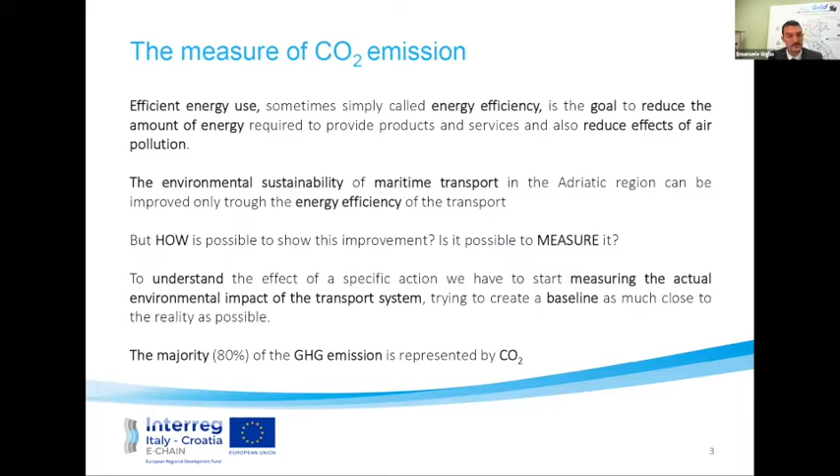If we were in an ideal world, to understand how much CO2 transport is emitting now, we would have to put instruments in every vehicle that we have in the world. Ideally, of course, this is not possible. It's far from being realized. So we have to find a way to estimate this emission, as accurately as we can.

But simplify it. Of course, we have to remove some factors in this calculation. Several ways exist that are really different, and I will show you two of these calculators.

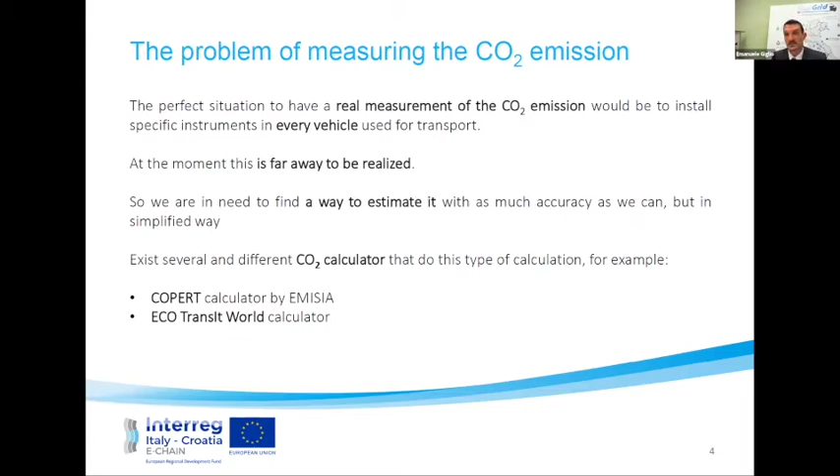That is the Copert calculator made by EMISIA, and Ecotransit World, which is a calculator, a website. We start with the Copert calculator.

Why did we choose this? We chose this calculator because it's the EU standard vehicle emission calculator. It's developed by EMISIA, a spin-off company of the Aristotle University of Thessaloniki. And it uses vehicle population.

So we are talking about terrestrial vehicles, to calculate the emission and energy consumption of this type of transport. Copert's development is coordinated by the European Environment Agency, in the framework of the activities of the European Topic Center for Air Pollution and Climate Change Mitigation. The European Commission Joint Research Center also manages the scientific development of the model.

So Copert is something really official, and the characteristic of Copert is that it's internationally recognized. It is used by many European countries for reporting official emission data. It's an incredible research tool, used by a lot of universities to calculate emissions nationally, regionally, and also on a local scale.

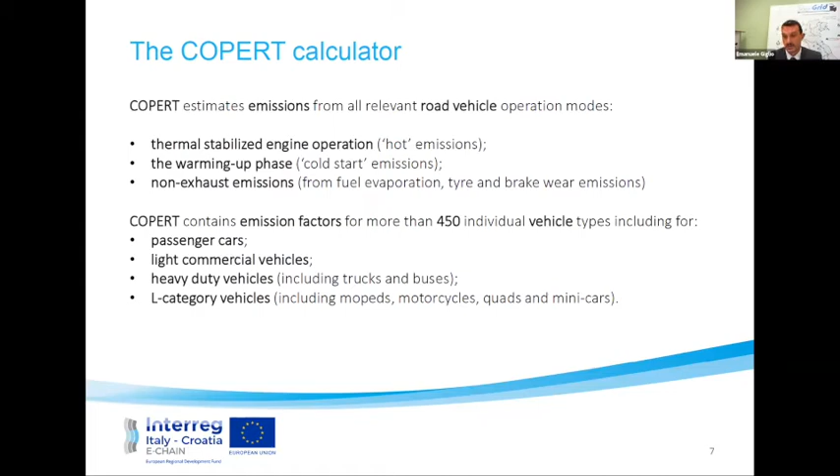So we, as Echain, decided - because of our project, and I will show you something about Echain afterward - to use Copert to calculate the CO2 emission of transport. Then we will see a bit further, a bit better, how.

The other calculator I want to show is Ecotransit World, and I decided to show it to you because it's one of the most widely used software for automatic calculation of energy consumption, carbon emission, air pollutants, and external costs about different types of transport, not just terrestrial vehicles.

It's compliant with different standards. That's really important because it gives scientific approval to this method, such as the GLEC framework, DIN EN 16258, and the GHG protocol.

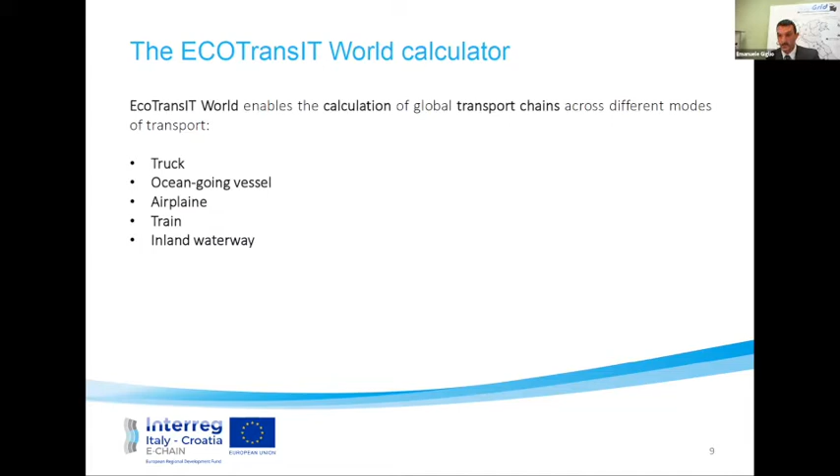The characteristic that's really important about this freight transport calculator is that it includes truck, ocean-going vessel, airplane, train, and inland waterway. So it can give you a real complete analysis about the CO2 emission of a particular path.

Ecotransit World calculates energy consumption, greenhouse gases, air pollutants, and external costs based on an energy-based bottom-up approach, including internal routing. As we said, the methodology is provided by independent scientific institutes, such as the Fraunhofer Institute of Material and Logistics, Ifeu, and Infras. The emissions are determined on the basis of energy requirement, using the associated fuel and other parameters, and carrier-specific internal routing is the base for identifying the route characteristics.

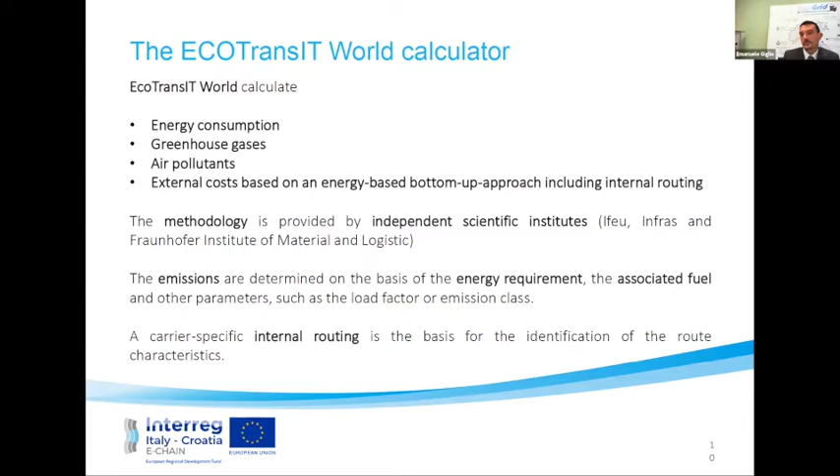So these are two of the most widely used calculators, but they are always an estimation of CO2 consumption and CO2 emission about different types of transport.

Differently is this regulation that I will show you now, because in 2015, the European Parliament and the Council of the European Union adopted this regulation, 2015-757, when in this regulation, the European Parliament decided that they have to research something, to check how much CO2 the big vessels are emitting from the sea boat, from the ship.

The regulation was about the introduction of a union MRV system, so monitoring, reporting, and verification, for monitoring CO2 emission for every ship in all intra-union voyages, all incoming voyages from the last non-union port to the first union port of call, and all outgoing voyages from a union port to the next non-union port of call.

They were thinking, the idea when they decided to adopt this regulation, is that every time you measure something, every time you have data about something, there is a natural improving of efficiency, that can lead to emission reduction of up to 2% compared to business as usual. So they were thinking about that in this way. They would have a baseline about the CO2 emission of the maritime transport, and also an improvement of the reduction of the emission.

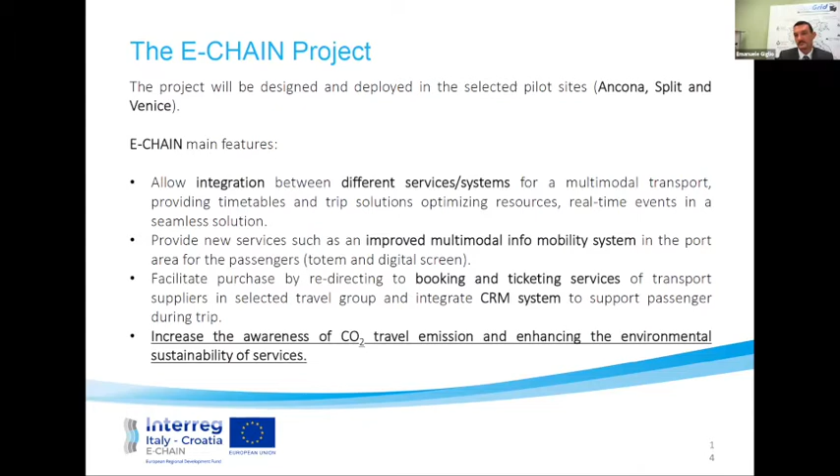Using all this data, we can help reduce the impact on environmental transport. I know I was really fast, but I think the other colleague will be much more specific about how to do this in their project. This is the way that Echain decided to pursue reducing the environmental impact of transport, just to give more awareness to the passenger so they can choose the best option. Thank you for your attention.

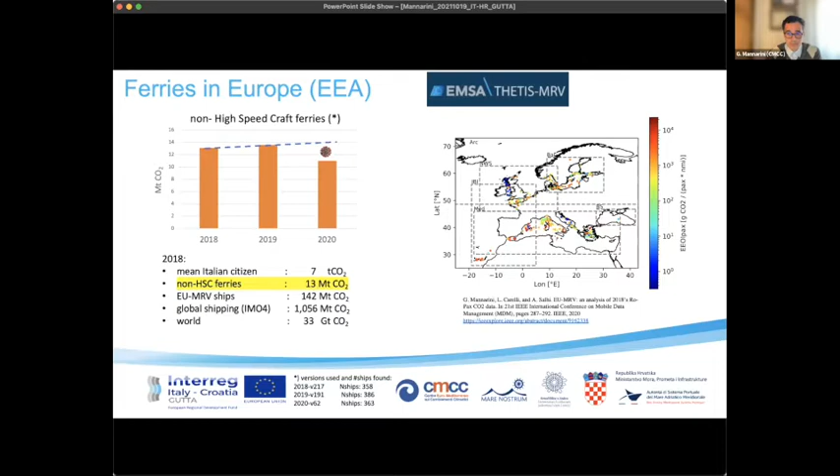This point about efficiency is quite relevant, as it is the subject of a quite recent regulation by the International Maritime Organization, which last summer, in June exactly, approved a plan to reduce the carbon intensity of all ships globally, not just ferries in Europe, according to a specific trajectory.

So there is initially a very mild, low, close to business as usual reduction, and then starting from 2023, there is an increase in the reduction speed for this carbon intensity figure. However, there are indications that this measure will not be sufficient for achieving IMO's goal of decarbonization, not even to halve emissions by mid of this century. So it is likely that this regulation will be soon reviewed for increasing the rate at which ships and ferries should increase their energy efficiency.

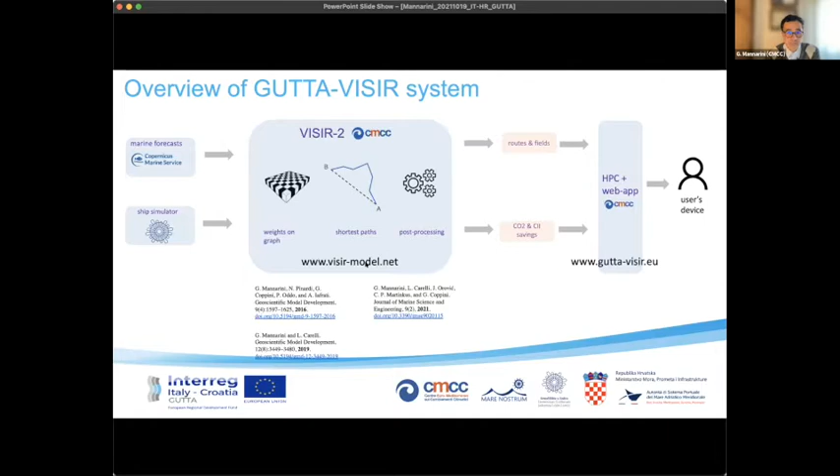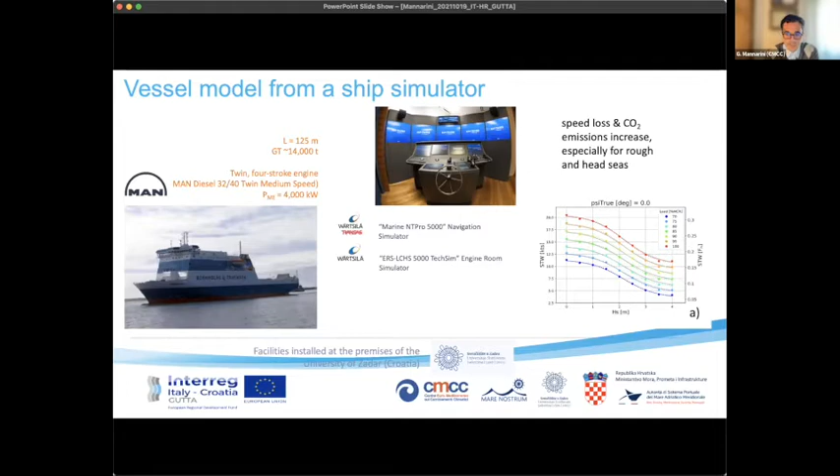But I have just 5 minutes to go to some of the results. For achieving these results, we used also data from a ship simulator installed at the University of Zadar, which is one of the partners within the GUTTA project. Basically, we have the capacity to compute how the ship behaves in both wind and waves. Specifically, as you would expect, the ship will decrease its speed. There is involuntary speed loss in waves, especially for head seas, and corresponding CO2 emission increase.

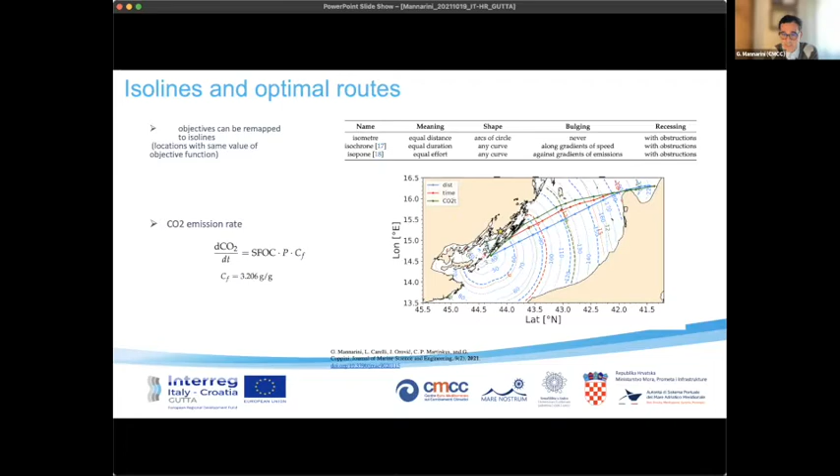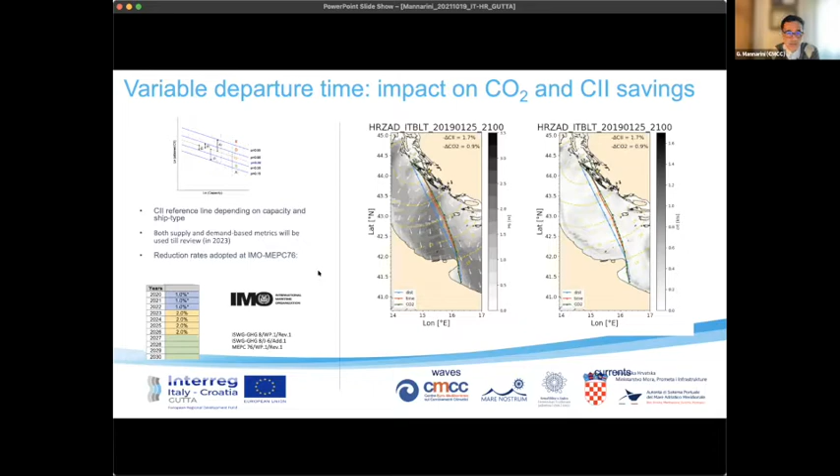And then we embed these into VISIR for the computation of optimal routes from Croatia to Italy and vice versa. We are able to compute least distance, least time, and least CO2 routes, which can be different depending on the meteo-marine conditions. For instance, in this animation, you would see that for various departure dates and times, the optimal route changes, and correspondingly, the CO2 and carbon intensity saving. So this is the link to the IMO regulation I mentioned at the beginning of my talk. Basically, we are able, through this system, to compute what would be the carbon intensity savings for a ferry sailing, making expert use of the meteo-oceanographic information.

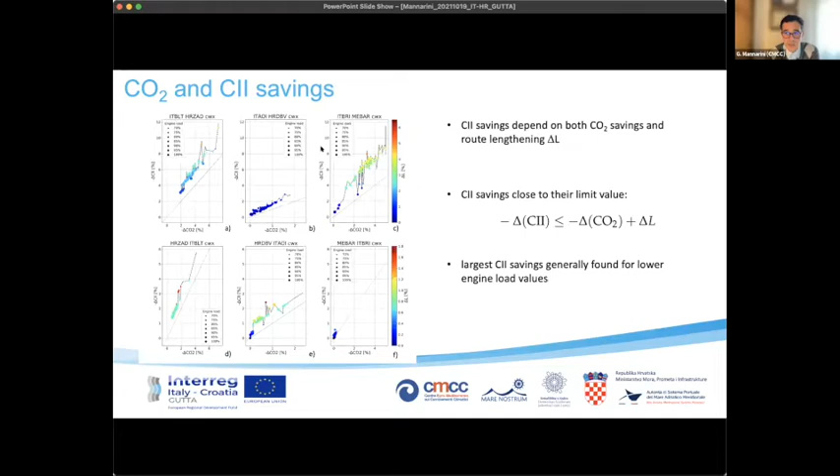In a publication we made last year, we started with a case study for assessing how large these savings can be, and they can indeed be quite large. But the definitive answer about this cannot come but from an operational system, which you access every day, starting from the freshest forecast data.

And this is what we realized at gutta-visir.eu, which I invite you to visit after this seminar, maybe. I would really appreciate if you could provide your feedback as a user, since we are in a kind of beta version, so it's in an experimental phase. We still have some time before project end to improve the portal and the system to come closer to the needs of the users, both the professionals and generalistic users.

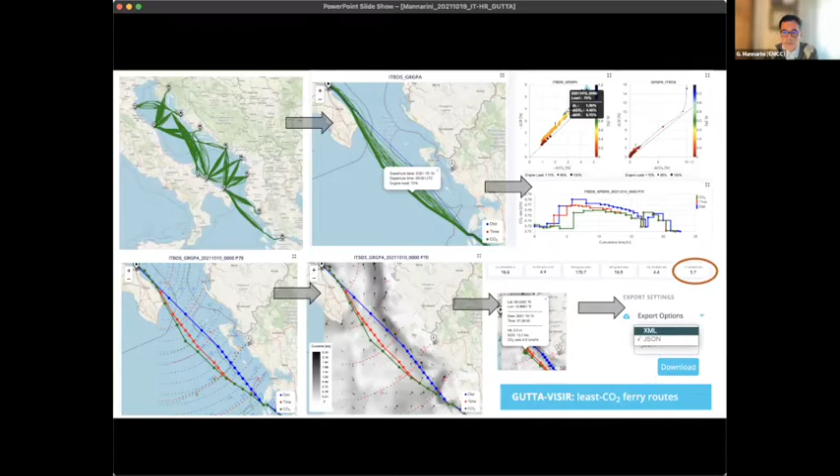Finally, 30 seconds to conclude. Ferries are the focus of GUTTA, for improving the connectivity between Italy and Croatia, and because their emissions are over-proportional with respect to other ship types. The operational voyage planning is a solution for contributing to decarbonization for both old, existing and new ships, even for those fueled by low carbon fuels.

We have realized this GUTTA-VISIR service, which is based on a scientifically sound and open access model for ship routing. The service is freely accessible through an open web app. We have evidence of significant CO2 and carbon intensity reductions, of course, when there is some significant weather condition to be avoided. If the weather is calm, it's much more limited.

And we are really looking forward to entering this phase where we validate this system together with the stakeholders, the ship masters, the vessel traffic systems, the ports, the harbors, and so on. So thank you very much for your attention, and see you later on during the panel.

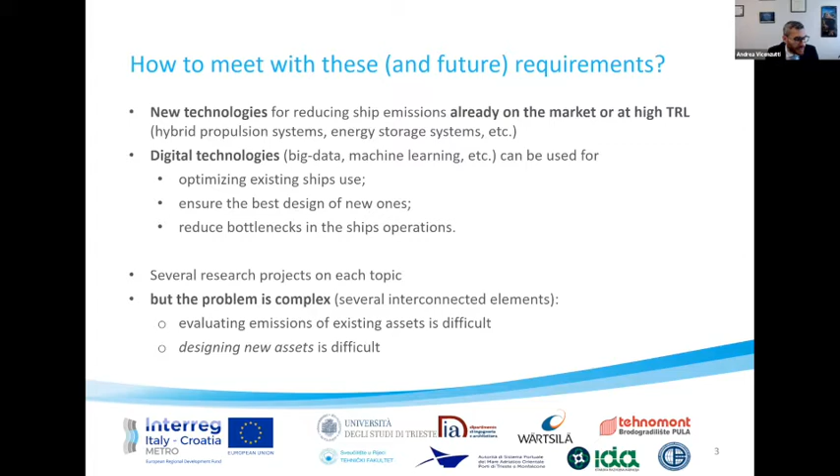This is difficult in the maritime sector because it is peculiar in respect to other industrial sectors. One thing we need to do is provide a proof of concept of how new technologies can be integrated into ships. We have a lot of pieces, like a Lego, hybrid propulsion, energy storage system, and so on, and we need to put them together into a ship.

We need to demonstrate to the future ship owner that the integration of these components ensures the expected advantages. We need lower pollution, but also need to demonstrate that the integration of these new pieces does not make the ship worse in other key performance indicators, like reducing too much the payload.

Moreover, we need to do that for each specific ship type, because a dry bulk carrier is different from a tanker, which is different from a passenger ship. We need to do that for each different route, daily operative routine, specific work for ships that can do different works, and so on.

Last but not least, we need to ensure the existence of the proper support land infrastructure. For example, if we want to use ships with LNG, we need the LNG bunkering facility, and then we need someone who produces and transports the LNG to that facility. So we need to shift toward a design approach which is more integrated.

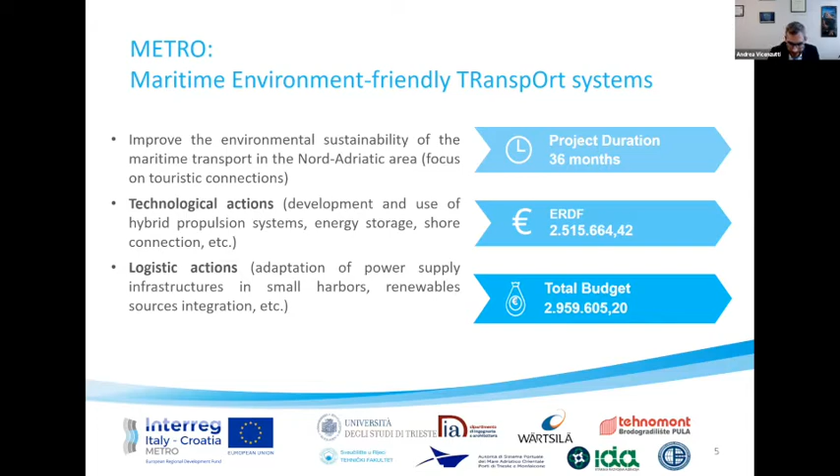Being the maritime sector huge, we cannot do the project considering all possible ships and all possible routes. So we decided to focus on 2 routes and 2 ships.

We selected a short route but with heavy traffic, the Brestova-Porozina route, which is actually served by a double-ended ferry. And then the Ancona-Split route, a medium-length line, served by a roll-on, roll-off passenger ship.

In this regard, we made the preliminary design of 2 new green ships using commercial off-the-shelf technologies, so nothing from research, only pieces that can actually be bought from the stores. And then we evaluated the port and land infrastructure that needs to be used for supporting these ships, proposing upgrades when needed.

There is also a point on analysis and promotion of multimodal transport, which is more related to the Brestova-Porozina route because its ports are very small and they need more integration with the transport systems and so on.

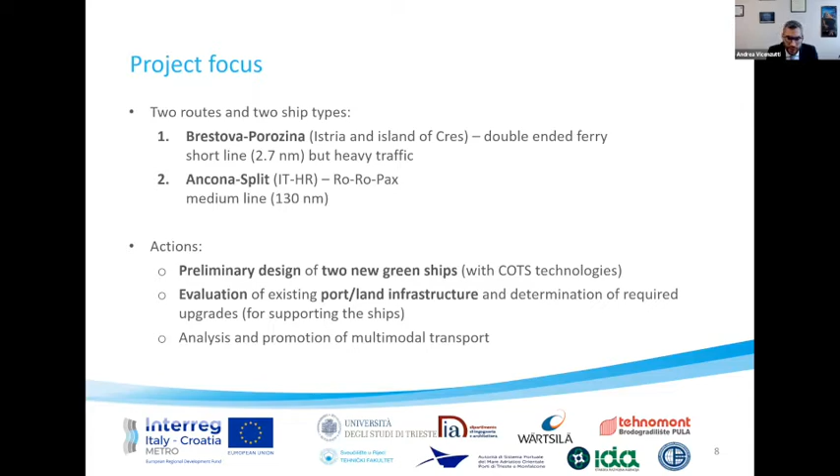So this is an example of what we have done. This is the design of the bidirectional ferry for the short route, Brestova-Porozina, which we have done applying a data-driven design process.

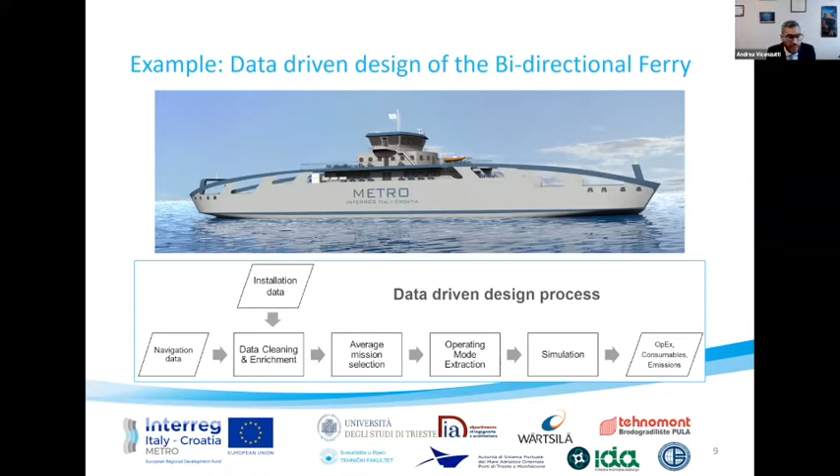We started from data of the existing route and used that to extract all the possible information for designing the best ship for that route. We selected the best ship for that route, considering things like operational expenditure, consumables, and obviously pollutant emissions.

This is on the left. You can see the location of the route, which connects the Istrian Peninsula with the Cres Island. And on the right, you can see an example of the data we used.

Here we have a set of sampling of speed and position taken from January 2016 to June 2019. There are like 125,000 samples, and we use data like this for extracting the speed and position samples, estimating the ship operation, and so on.

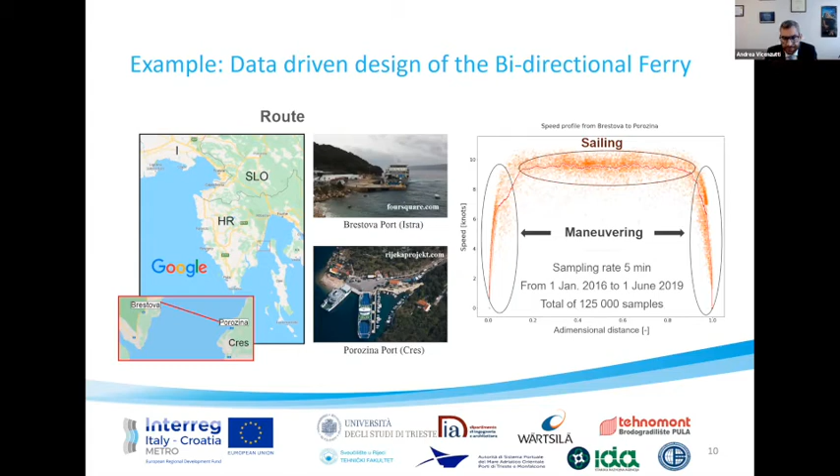Using the data, we evaluated different configurations for the propulsion system of the ferry, more than 4. I show you 4 only as an example here, which start from the conventional diesel mechanical propulsion system, the one actually used on that route, and then go toward more hybrid solutions with electrification and so on.

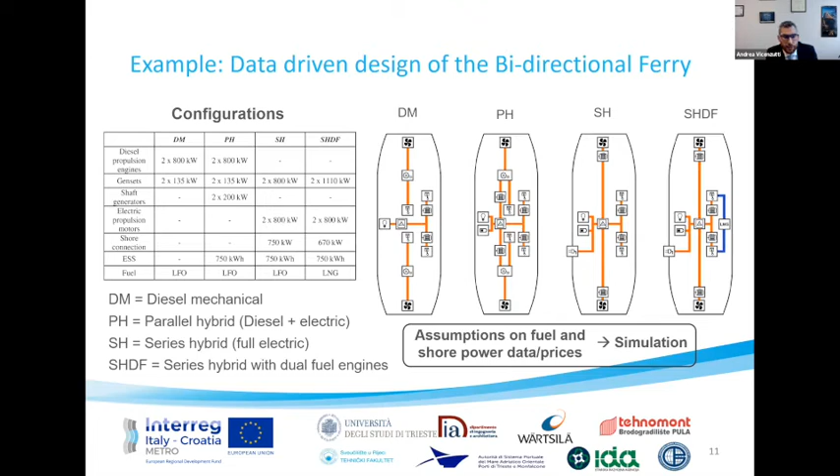We put some assumptions on fuel and shore power data and prices for doing the simulations, and we evaluated the impact of each possible configuration on the outputs. These are, as an example, the annual carbon dioxide emissions for the 4 configurations.

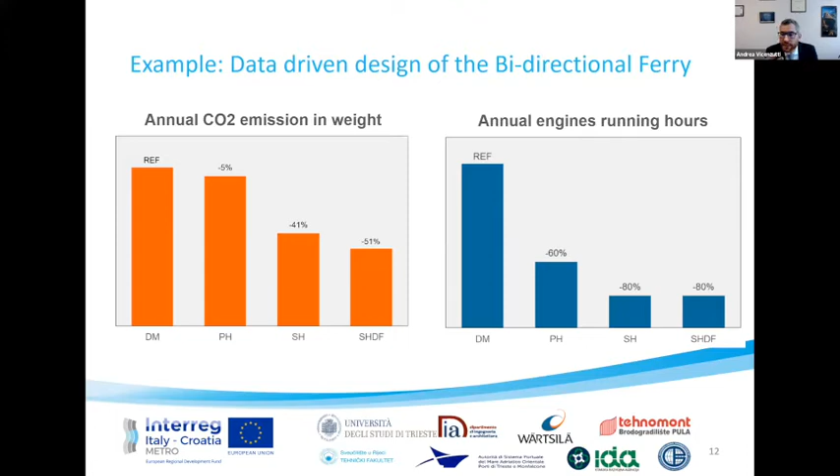We have taken the existing ship as a reference, and then we compared it with other solutions. You can see that the 3 shown solutions allow us to reduce carbon dioxide emissions. They also allow us to reduce the annual engine running hours, so less.

And we also evaluated the operating expenditure for the owner. As you can see, for the series hybrid, which is the 3rd one, and the series hybrid with dual fuel, so with LNG, there is a high percentage of the operative expenditure that depends on the price of the shore power, so the cost of the electricity given by the shore, because they have an onboard battery system which is charged by the shore.

All the solutions that have some electrification allow us to reduce carbon dioxide emissions, engine running hours, and also allow us to reduce the operative expenditure for the owner. This is significant because it means the owner is not only pushed towards buying a new ship because otherwise the policies make him pay more, or he cannot use the ship anymore, but it's also giving him a motivation regarding costs. We can both do something good for the environment and reduce costs. So it's good for the owner. This promotes the change of ships, the move toward a more sustainable transportation system.

So we selected the series hybrid, the 3rd column in the picture, as the best compromise, because the 4th one, the best one, uses LNG, and none of the ports had nearby LNG bunkering facilities. So we selected that for designing our ferry, for doing our preliminary design.

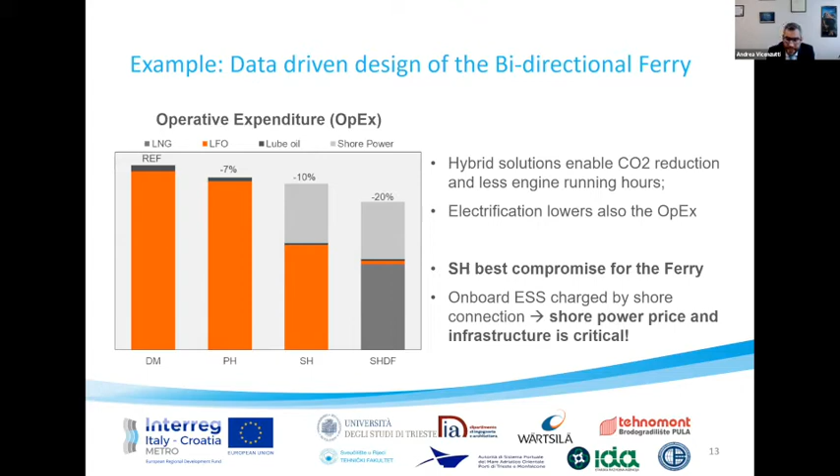So we also, as I said before, analyzed the land side of the problem. This is a very short and easy example for demonstrating what we are doing in this regard. We have seen that there are some parameters that affect how the same ship behaves depending on the port side. The first thing is the presence or not of the recharge infrastructure in the ports on the route - whether it's only in one port, in 2 ports, and so on.

Also, the shore connection power has a significant impact. Also, the time at berth, because the onboard batteries can be recharged only when the ship is berthed. So if the ship is berthed for a very short period of time, we have no time to recharge the battery. All these parameters can have a really big effect on the results given by the same ship, which was the best one we conceived for that route.

So I'll show you just a short example based on the same ferry on the same route, a short route. In this case, we changed only the power of the shore connection for recharging the ship. We used a low power shore connection, which is the 160 kW one, which is sufficient for achieving the recharge during the night of the entire battery of the ship, but then cannot be used during the day.

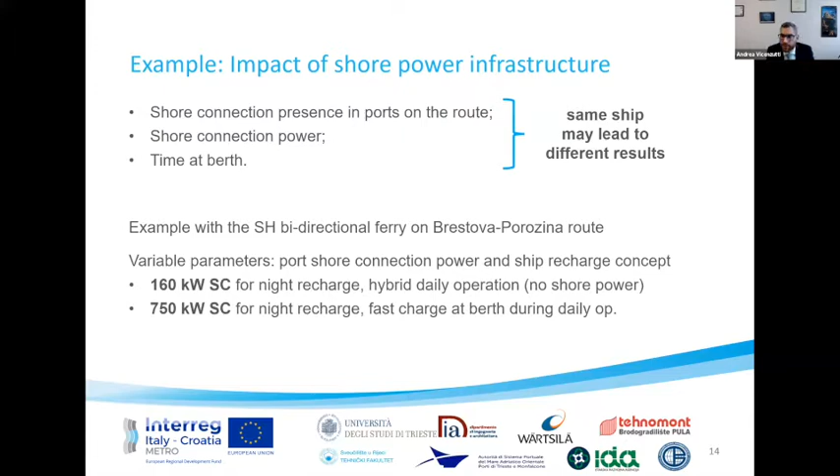These are some results using the daily zero emission navigation quota, which is not the correct environmental impact index for evaluating this, but it's very easy to visualize. So it's easy.

It's easy to use it as an index in this case. So for the low power shore connection, we can define if during the day the ship uses its onboard generators at max power or max efficiency, and this has an impact on how much time the generators can be running or not. And for high power shore connection, we can decide to put the shore connection in one port or in both ports. And given the power level, this has a significant impact because the 2 ports in this route are very small ports.

Actually, they have less than 1/10 of the power installed on board. So they will need significant refitting of the existing power infrastructure for enabling such high power shore connection for recharging the ship. We can see something very significant here: the high power shore connection is both the one giving the best and the worst results, depending on whether it is installed only in one or in both ports.

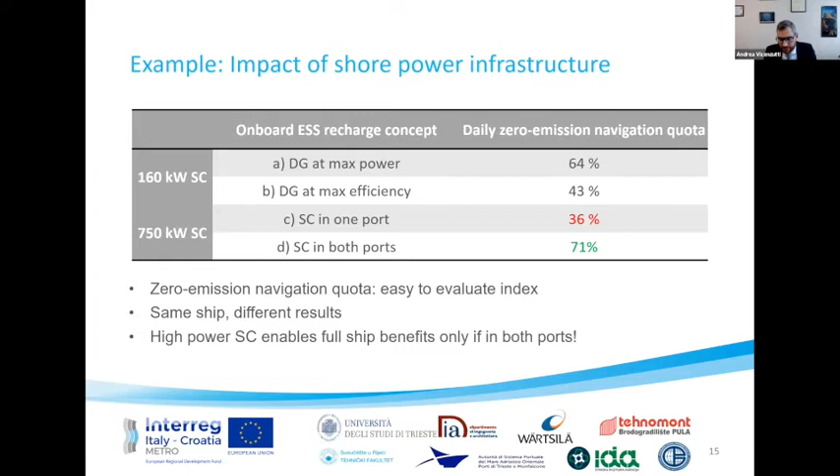And also, the same ship used in different ways with different port infrastructures can have very different results. This is an indication that the port infrastructure is relevant, and we need to address it when designing the ship. Otherwise, we cannot achieve the expected advantages from the ship. We may have designed the best ship, and then it performed very poorly because we didn't address the things that are on the outside, on the land side.

So as a conclusion, we all know that electrification is one of the tools for improving the environmental sustainability of maritime transport. But we also have seen during the project that the final result depends a lot on the input data, on parameters like the cost of shore power, the length of the route, the speed of the ship, and so on. This means that, first of all, we need to design different ship architectures depending on the type of ship and the specific route we need to address.

From the land side, we also need to take into account the port infrastructure, because the port may add constraints that have a significant effect on the ship, making it perform very differently from the expected performance level. This means there are cases in which we need to upgrade the port infrastructure for supporting the new green ships. So as a final remark, during this project we have learned that designing a more sustainable transportation system requires an integrated approach, which considers the ship in all its different parameters and so on.

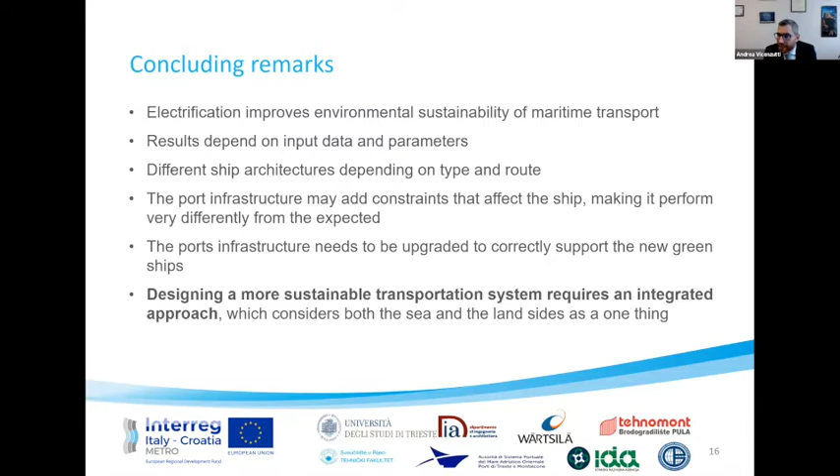We need to optimize the ship, which is something that is already being done, and there is a lot of research on that topic. But we also need to address the land side of the problem and address them together—not designing the ship, designing a new port, and then hoping maybe they will fit well together or not. Thank you for your attention.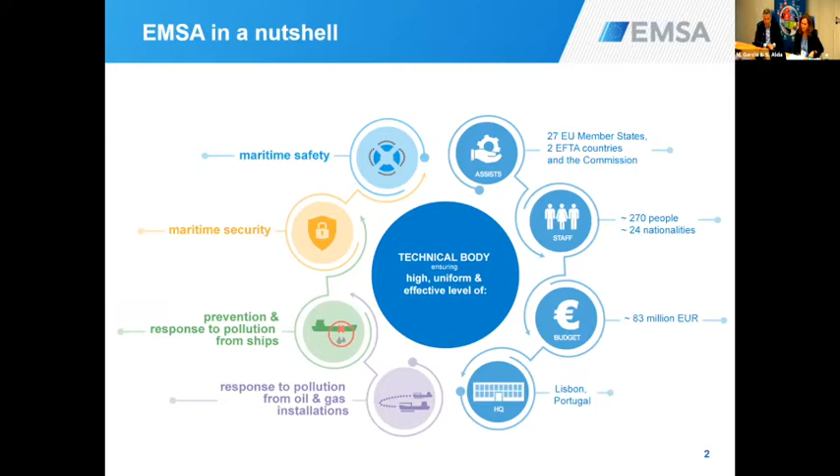We have standby oil recovery vessels around Europe to assist in pollution incidents whenever they happen. We have systems like CleanSeaNet for detecting oil spills, providing satellite images of oil spills. We also have a number of applications in support of European legislation. Our main task is to provide technical advice to the European Commission and EU member states. The agency was created to deal with maritime safety after the sinking of the Erika, an oil tanker, but it has evolved, and nowadays we cover a range of activities, including pollution prevention. The area of sustainability has grown considerably in the last 10 years.

I was looking into the polls before, and there was a question about how much you know on sustainability issues regarding maritime transport. I have to say we have the perfect document to start with. We just published, on the 1st of September, the first European Maritime Transport Environmental Report.

This report covers all the environmental aspects of maritime transport, dealing with air pollution, water pollution, and emerging topics like underwater radiated noise or marine litter. We provide considerable information to understand the actual impact of maritime transport in these various aspects.

While working on the report, we went through the various areas dealing with sustainability. In the second half of the 20th century, most of the focus was on oil pollution - MARPOL, the main convention dealing with pollution prevention, was adopted in 1973 and 1978. Air emissions only started to get focus towards the end of the 90s, with the corresponding annex adopted in 1997. In the last 20 years, we've focused pretty much on greenhouse gas reductions, which is now the main subject, along with other emerging areas like underwater noise and marine litter.

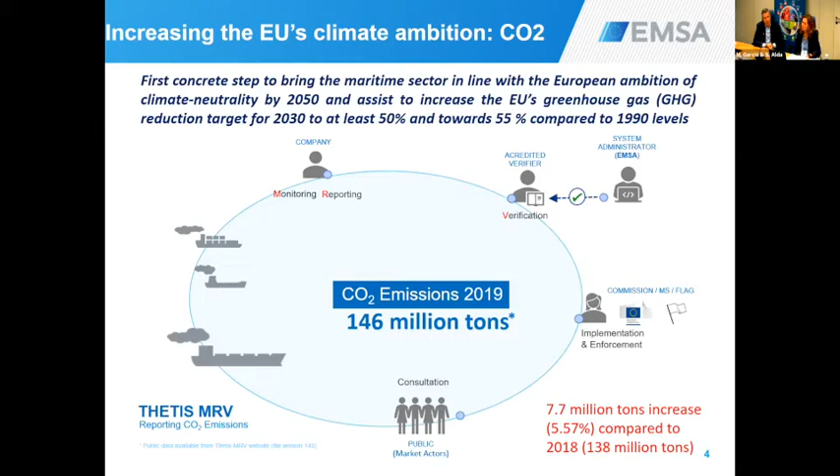This year, on the 14th of July, the European Commission, looking into this target of the 55% greenhouse gas reduction target for 2030, delivered what we call the Fit for 55 package, a number of proposals in order to deliver on this goal. The package of measures has to be seen as a whole, because there are aspects which are dealt with in the various different proposals.

When it comes to maritime, there are a number of proposals which are quite relevant. On one side is the extension of the emissions trading scheme in the EU to maritime transport, starting from 2023 already, which will impose a cap and trade on carbon emissions from ships.

We also have a proposal for FuelEU Maritime that will target a reduction of the greenhouse gas intensity of ships on a yearly basis. There will be some reference lines, and ships will be obliged to reduce their greenhouse gas intensity and achieve these targets every 5 years. FuelEU Maritime will try to promote the uptake of low to zero carbon fuels and other alternative zero pollution technologies.

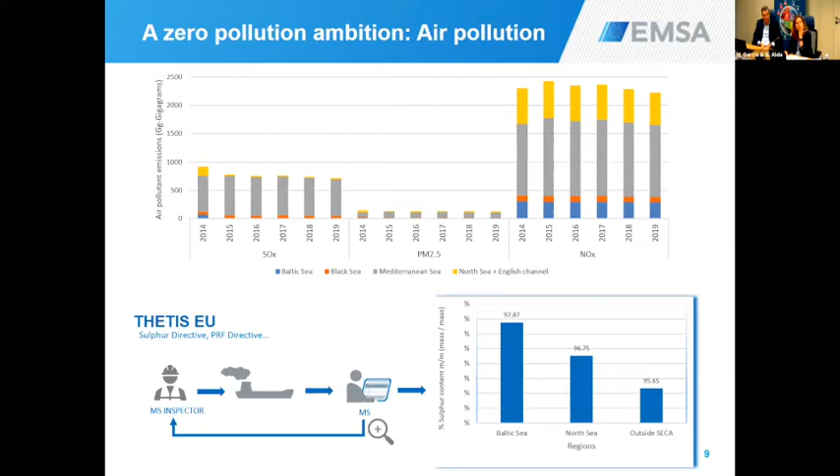But we think that with the new MARPOL regulation on NOx entering into force this year, perhaps we will also see a reduction in NOx emissions. Also, based on the experience EMSA has with SECA area implementation, EMSA is supporting the Commission in discussions at IMO for designating the Mediterranean as a SECA area.

However, EMSA also has tools for other concerns. I saw in the polls that people are concerned about oil spills, so EMSA has some tools to support member states in surveillance and oil pollution response activities.

One is CleanSeaNet, which I suppose most of you are familiar with. It's a satellite-based system that takes pictures of the sea surface in order to identify polluters and pass this information to member states so they can prosecute in case of a real oil spill at sea.

We have also had, since 2017, a network of RPAS providers under contract that can be used by member states during surveillance operations to support them, and also for SOx emission monitoring, as these RPAS can be fitted with sniffers to monitor emissions from ships in the area.

Another service that EMSA provides to help member states with oil recovery and pollution response is the network of vessels. EMSA has a network of vessels for oil spill recovery all over Europe, including one in the Adriatic area, which is the focus of this seminar. This ship is fitted with booms, skimmers, and oil pollution recovery systems, and it's ready to enter into action 24 hours after a member state's request.

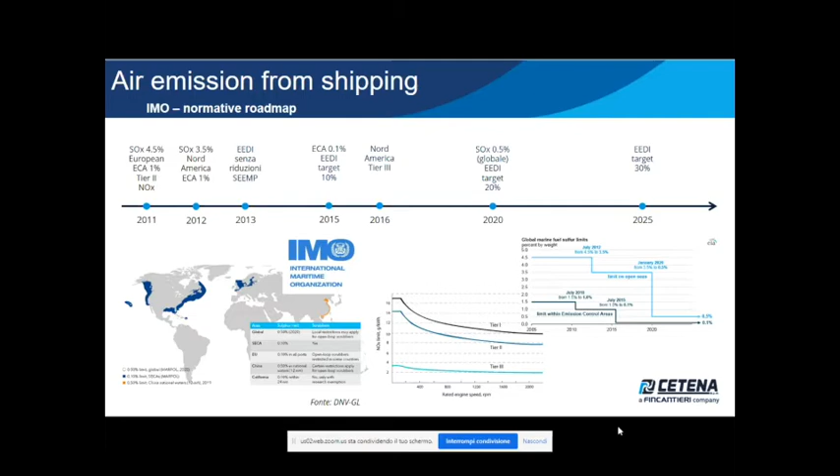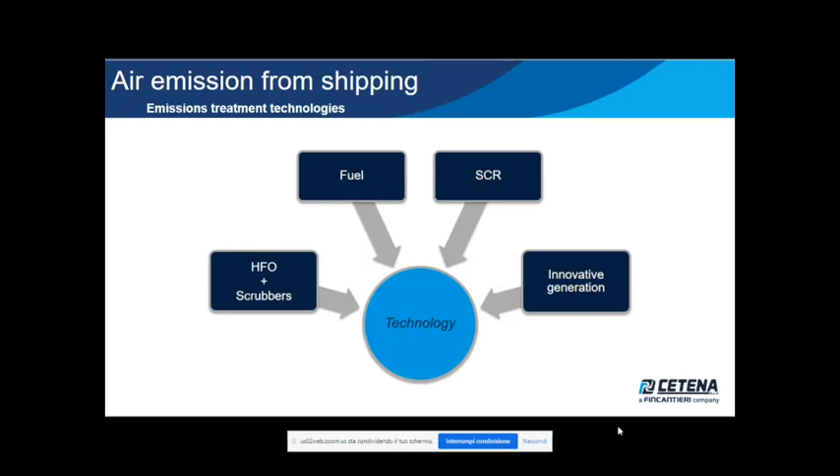The scrubbers are mainly used to reduce and eliminate SOx emissions due to traditional fuels, for example, marine diesel oil or heavy fuel oil. Mainly heavy fuel oil, because it is the fuel with the high percentage of sulfur inside.

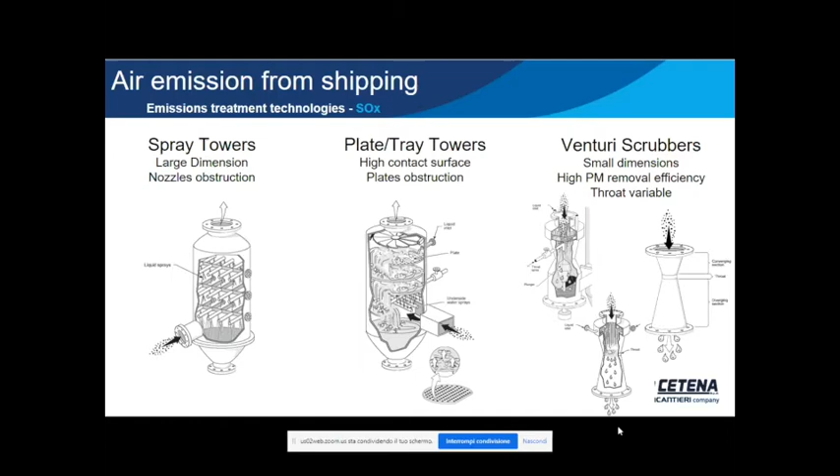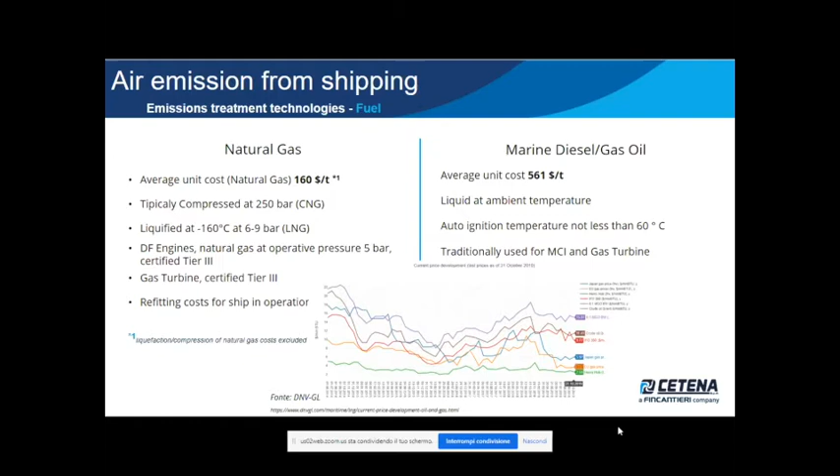For what concerns fuel, up to now ships have integrated on board natural gas, which has better performance for SOx emissions, or marine diesel oil, the traditional diesel with very low sulfur content. Here we have different benefits and disadvantages, such as the cost or the storing conditions on board.

Another technology to reduce the NOx emissions of a ship is, for example, the SCR. SCR lets a non-Tier III engine become compliant with the Tier III normative.

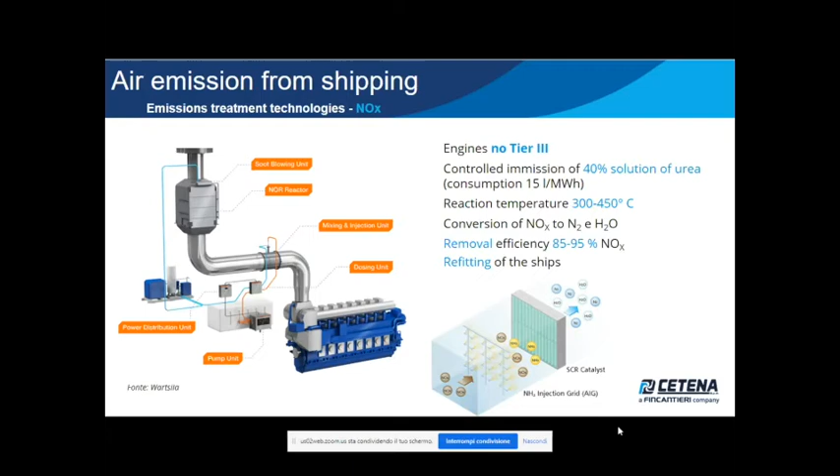Finally, the alternative fuels that are probably one of the main answers for the decarbonization of the shipping sector. The main sources are, for example, hydrogen, which has the advantage of zero emissions, because we have just water as emission. But probably the difficulties are, for example, the lack of legislation for integration on board, and also difficulty in storing this kind of fuel on board, both for volumetric reasons and for safety aspects.

The second one is ammonia, a fuel with zero CO2 emissions, but with several difficulties, such as safety and the low flash point of the fuel. These are the main difficulties, and it is also poisonous, which creates difficulty for human contact with such a fuel.

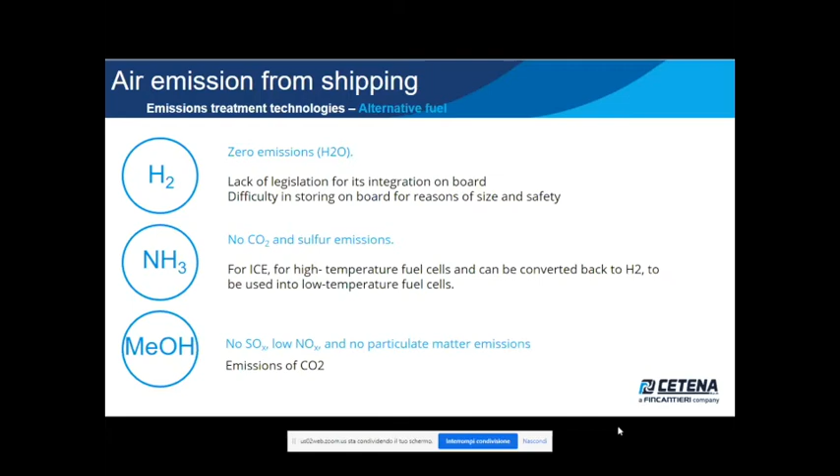The last one is methanol. Methanol does not reduce CO2 emissions compared with diesel. However, it could be produced with net zero CO2 emissions, because it could be produced with renewable electricity and renewable CO2 coming from other industrial sectors. It has no SOx emissions and very low NOx emissions. So these are the advantages of methanol compared to traditional fuels.

Cetena provides services both for the energy and environmental impact of ships, such as the calculation of IMO indexes, energy consultancy, and certified technical activities such as sea trials, electrical measures, and so on. We are very active on this topic, especially today with a new normative coming into force.

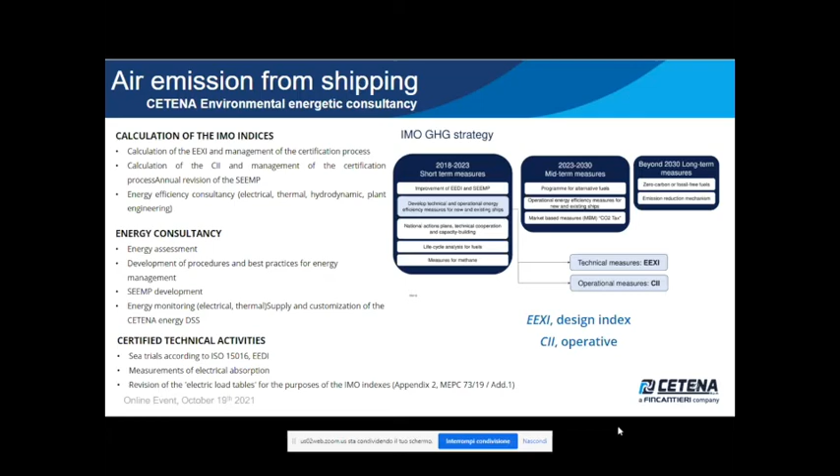We have different infrastructures and facilities for the examination of exhaust gases, as you may see: combustion analyzer, particulate matter measurements, and also smoke meter for soot.

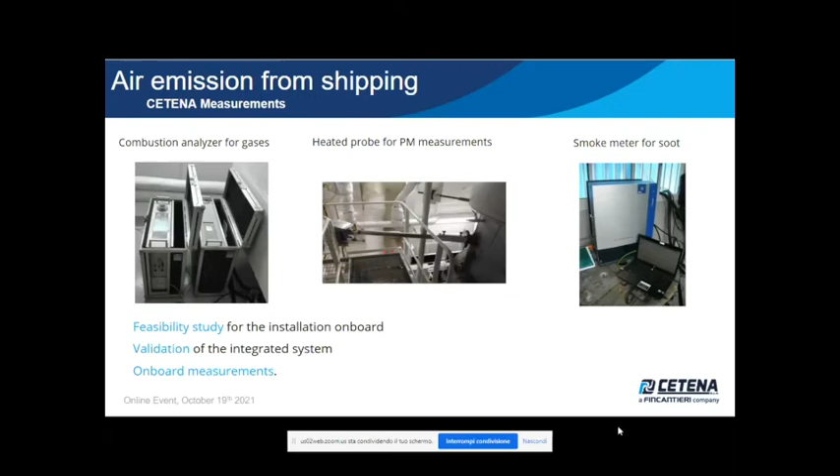Good morning again. My presentation will deal with underwater radiated noise, since there has been growing huge attention in the past years. For a long time underwater radiated noise was an issue only for some kinds of ship, such as military ships, research vessels, or fishing ships, while now it is growing in attention also for commercial ships and passenger ships that are sailing, for example, in marine protected areas and similar areas.

There are different activities that have an impact as a source of noise in the water, not only marine transport. Of course there are a lot of ships in our seas, so it is a growing attention by shipbuilders and designers of ships.

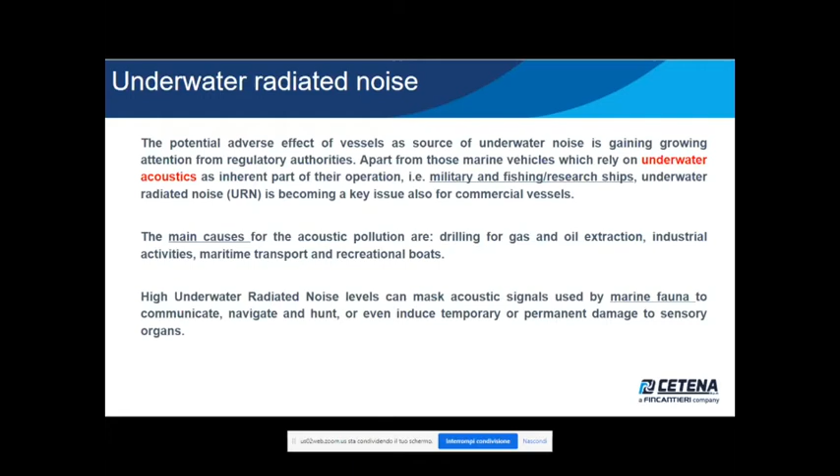In the EU, some recommendations have been defined, as in a presentation before us, in particular the EMSA presentation: the EU has been setting the MSFD directives. Some non-EU countries, such as Canada or the United States, have already defined noise limits, for example at port entrances, and sanctions have already been defined.

But of course, it is a topic that is growing, and the attention for our sector is growing very, very fast.

Typically, the underwater radiated noise from a ship can be divided into two main sources: the self-noise and the radiated noise. The self-noise is generated by the ship and detected on board the ship, while the radiated noise, which is the focus of my presentation, is the noise generated by the ship and detected in the far field.

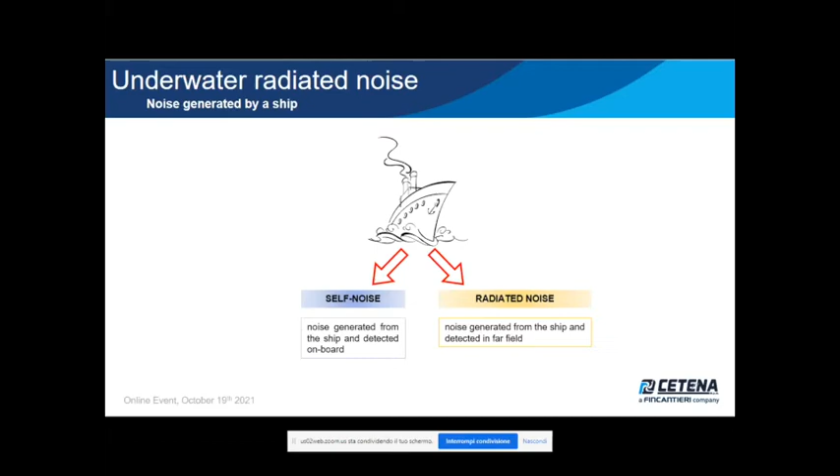The main sources on board the ship are machinery, which usually gives tonal contributions at specific frequencies, multiples of the fundamental, as seen in the graph on the right. Another main source is the propeller or propulsion system in general, which gives contributions over a very wide range of frequencies, both tonal and broadband, as seen in the graph on the left. Also the hydrodynamic flow gives broadband contribution, which could be very important, for example, for military vessels.

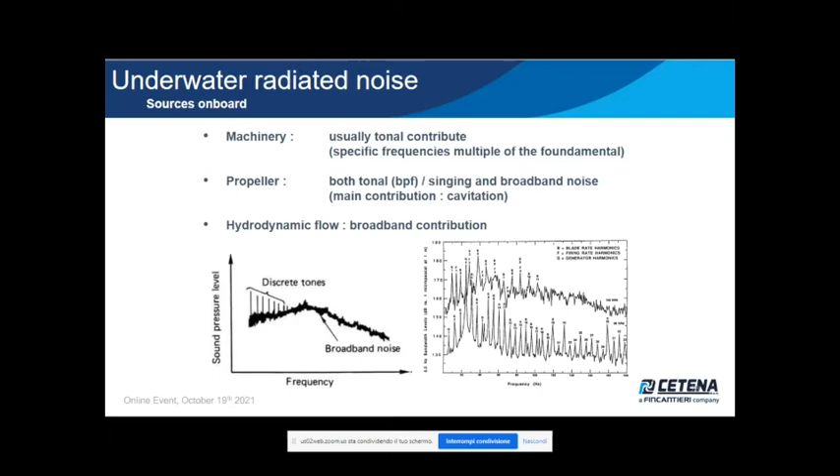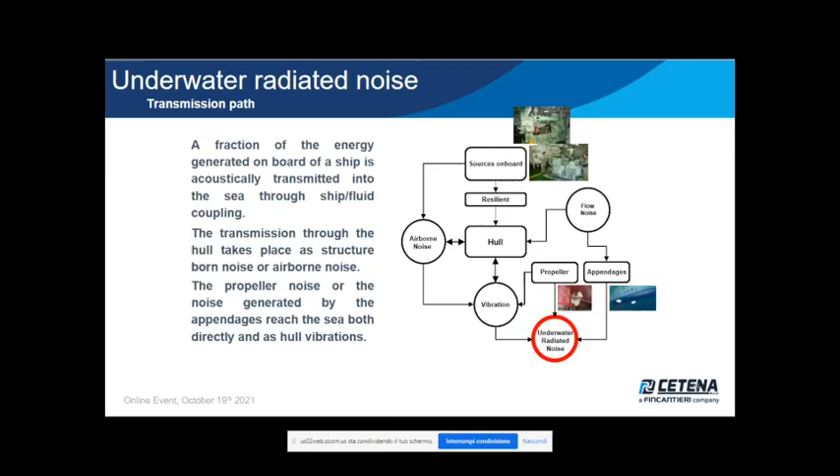The EU has defined the Marine Strategy Framework Directive, which has the goal to achieve or maintain the GES, the good environmental status of EU marine waters, by 2020.

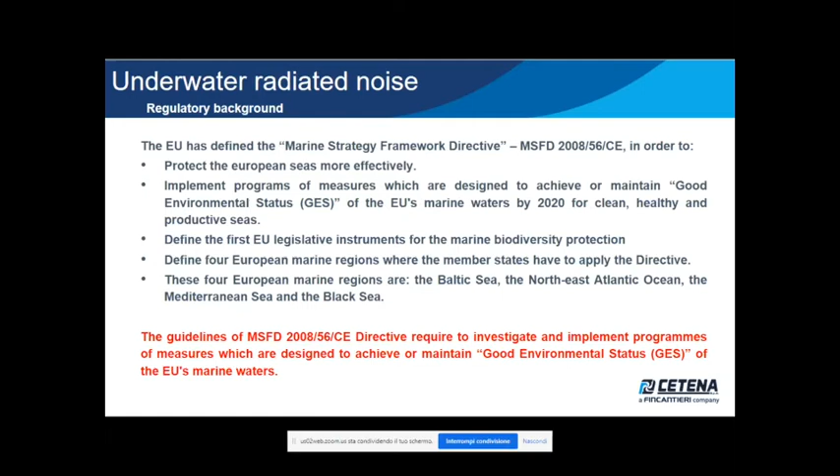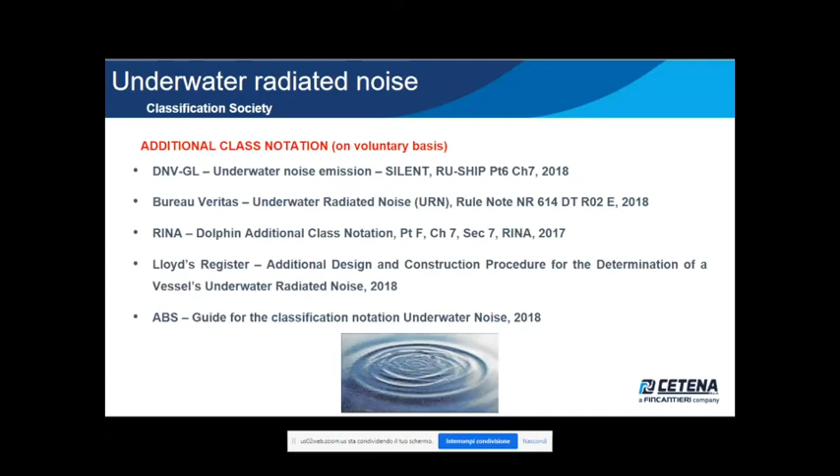On the other side, nothing mandatory is yet defined at IMO level, though rules are still being discussed. But on the side of classification societies, all classification societies have defined their own additional class notations. Of course it is not mandatory, but on a voluntary basis. The older one is the DNV GL class notation, but it remains only voluntary.

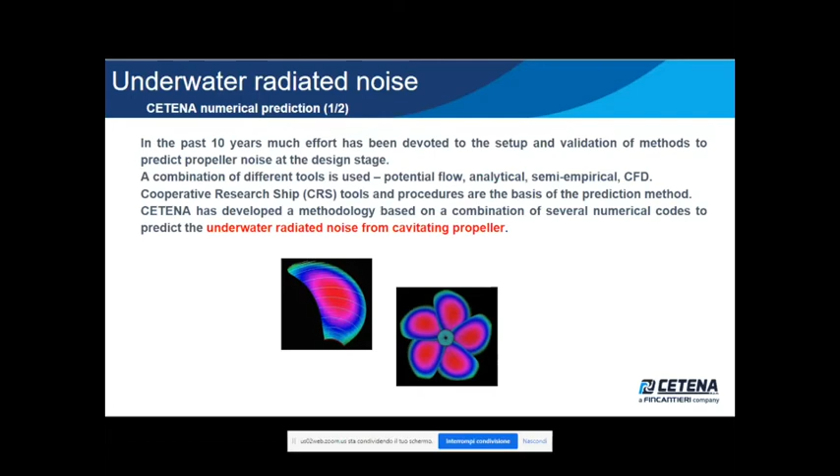CETENA works in this field and has huge experience, but in particular over the last 10 years we have developed a methodology focused mainly on cavitating propellers, able to predict at very early design phases the underwater radiated noise from cavitating propellers.

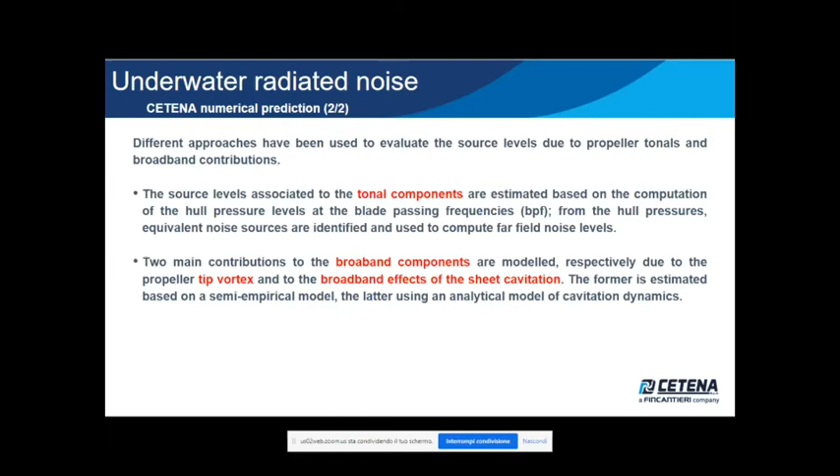Two main contributions are predicted through this methodology. The first concerns the tonal components, at frequencies multiple of the blade passing frequency. The other focuses on the broadband contribution, due to both propeller tip vortex and broadband effects of sheet cavitation.

The strength of our methodology is that we do both numerical predictions and validation through step-by-step measurements, so we can see the lack in our computational chain and which points need improvement. For ship hull flow at the propeller disk, hydrodynamic propeller behavior, and propeller pressure distribution on the hull, we measure with a Cyclope measurement system, acquiring simultaneously propeller video observation, so we catch the cavitation and propeller behavior, and also measure pressure pulses.

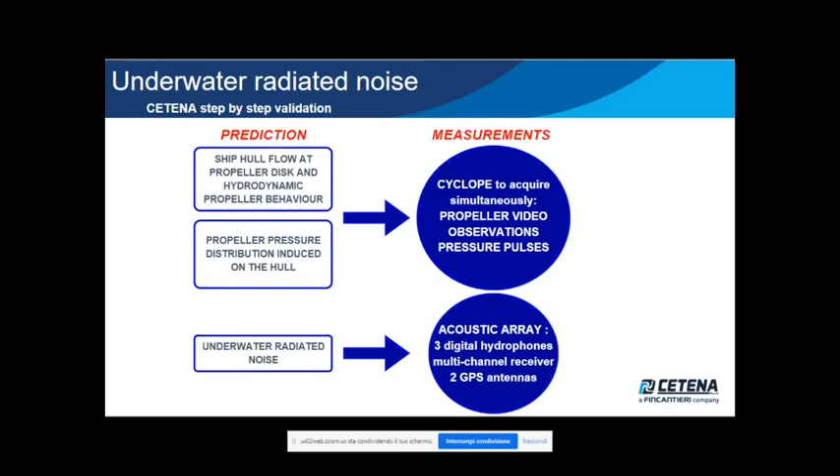For the underwater radiated noise, we have our own acoustic array made of three digital hydrophones and two receiving stations, one on the array and one on the ship being measured, in order to evaluate the real underwater impact of the ship.

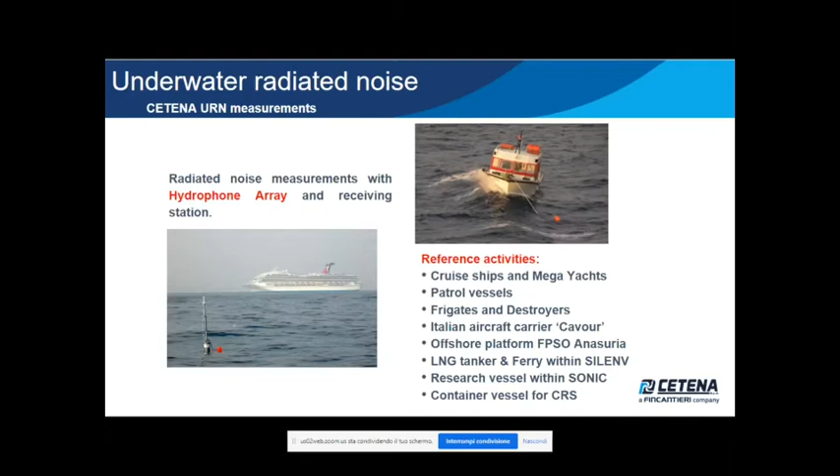This is an example of our activities with the hydrophone array in the sea and the ship sailing across our hydrophone. We are also active in a lot of European projects working on this topic. In the past we took part in both SILENV and SONIC projects. Currently we are involved in PIAQUO and SATURN projects. In particular, SATURN is the very first project that puts together the acoustic and engineering community with biologists, so we can really evaluate the impact of shipping on marine mammals and fauna.

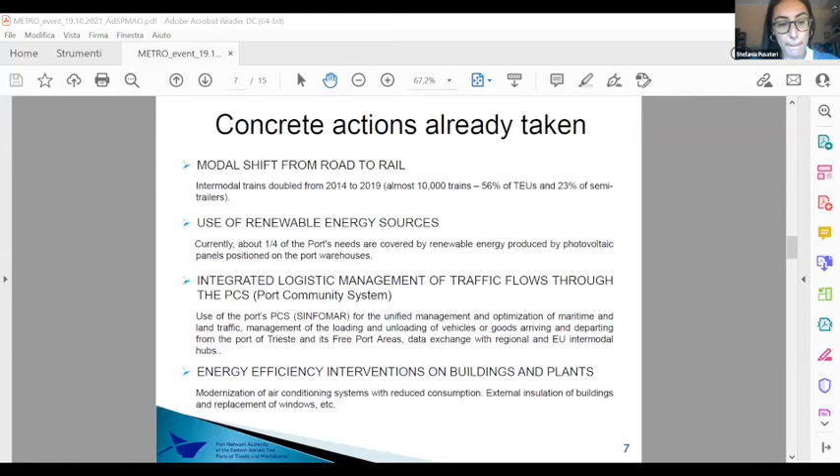Yes, good afternoon, I will start the presentation. I will briefly thank you also for the invitation, and thank you also to the previous speakers. I found all the speeches and presentations very, very useful and interesting.

So today I will give you the port perspective, more specifically the perspective of the port of Trieste, the ports of Trieste and Monfalcone. The Port of Trieste is a core node in the TEN-T corridor network, and the Port of Monfalcone is a comprehensive node. But they're both managed by the same public entity, the Port Authority of Trieste and Monfalcone.

As a port authority, we are a public body and a landlord port. So the private operators are those that actually implement the port activities, such as private terminal operators. Our role is to foster the development of port infrastructures, and also to contribute, in this case, to the decarbonization of the maritime sector, from a port perspective.

But the first step is knowing how much CO2 emissions are generated by all port operations. This is what we do, and what we started doing two years ago. As all port authorities, we are obliged to use the guidelines for carbon footprint calculations, developed jointly by the Ministry of Transport and Ministry of Environment of Italy. They were published in 2018, so we started working on them in 2019 right afterwards.

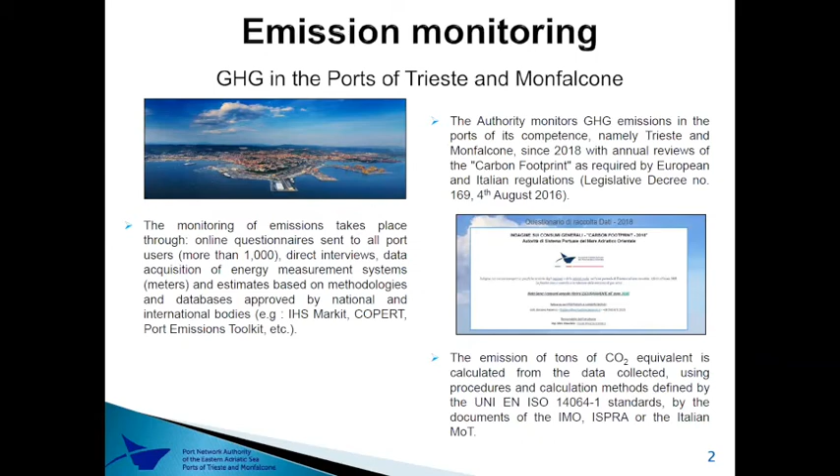We made a questionnaire for all the port operators, so the results we have do not only come from ships or only from terminals, but comprehensively from all port-related operations — from the ships entering the port of Trieste, including ships at berth, and all the port operations made on land on the quays.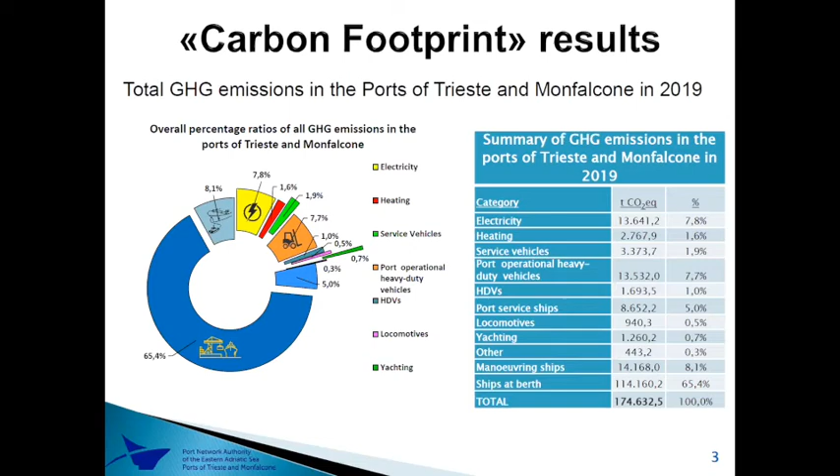This is a powerful tool because we keep it updated every year, but the numbers do not change that much. This helps because then we know where to tackle most of the CO2 emissions. We know that 65% of CO2 equivalent emissions come from ships at berth, so this is where we have to move to decrease that percentage.

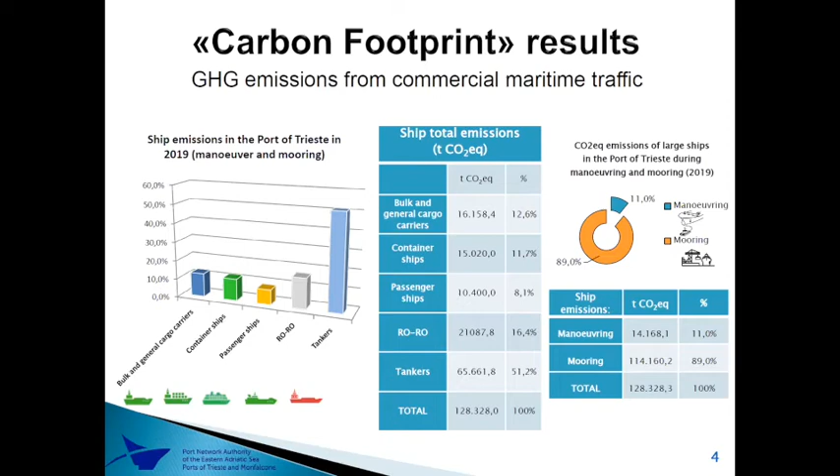This is another slide showing which kind of maritime traffic produces most emissions. Of course, the port of Trieste is an oil port — two-thirds of the total traffic comes from oil activities. So, of course, tankers contribute more than other ships to the CO2 emissions.

So how do we want to tackle this issue of CO2 emissions, how do we want to decrease it? Well, first of all, we have our own strategy that I will introduce later, and we try to implement the strategy thanks also to EU funds, and this is my job mainly. We currently run six EU-funded projects, funded by different programs — INTERREG, Italy-Croatia, but also Horizon and CEF — to decrease the CO2 emissions.

So which are these projects? Well, Metro was already introduced by Mr. Vincenzotti, and in that project, for instance, we are finalizing the project design for cold ironing in the Molo Bersaglieri, which is the cruise terminal. In the Clean Berth project, we make smaller investments in installing charging stations for electric vehicles, but other ports do other things. For instance, the port of Venice has introduced sensors for monitoring noise, and the port of Luka Koper in Slovenia introduced sensors to detect pollution at sea.

Susport is another project co-funded by the Italy-Croatia program. It's quite a big project, seven million euros in total, gathering all the port authorities of Italy and Croatia in the Adriatic Sea. As Port Authority of Trieste, we finalized the project design for cold ironing in the container terminal, and we also replaced all the lighting system with LED technology.

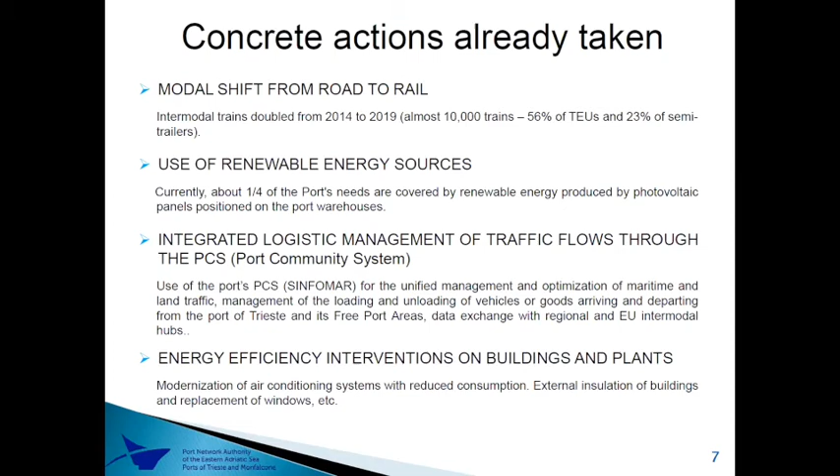Almost 25%, a quarter of the port's needs, are covered by renewable energy produced by photovoltaic panels. We have advanced IT systems, a port community system which improves efficiency of entry and exit of trains and trucks, contributing to reduction in congestion and CO2 emissions and air pollution. We will also be working on energy efficiency interventions on port buildings. So as you can see, a comprehensive set of actions, focusing on all the sources of CO2 equivalent emissions in the port.

Some figures concerning modal shift - I'll leave you the slide, so it's not so relevant for me to show everything. Just underlining that the role of rail for the port of Trieste is essential for its competitiveness, but also for reduction of CO2. Currently 56% of containers or TEUs run by train, and 23% of semi-trailers. I think this is a very good result.

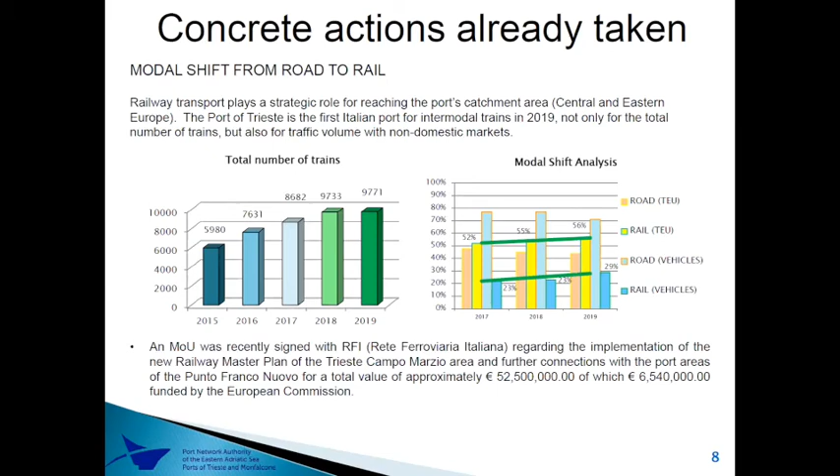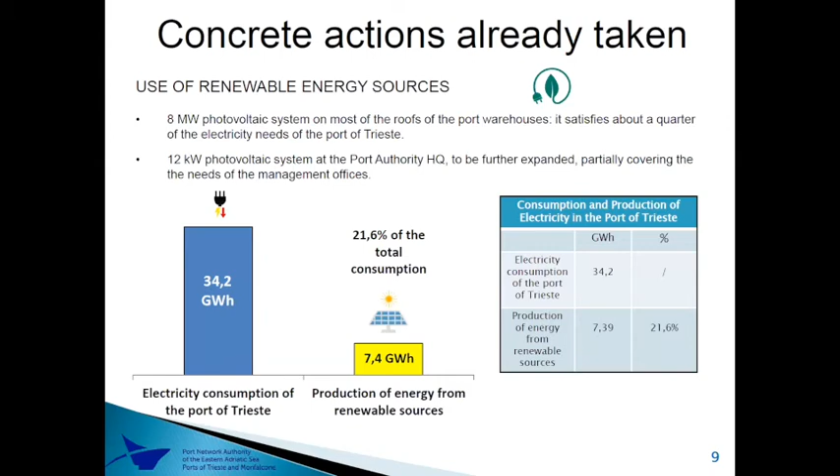Others, as I said, production of electricity from renewable sources already covers almost 22% of the total energy consumption in the port. And what do we want to do next?

Well, first of all, not only thanks to European funds, but also national funds, the Italian government has allocated, will allocate, 25 million euros for each port in northern Italy under the so-called Green Ports Initiative. So what shall we do? We will install electrification of most of the port berths in Trieste and Monfalcone, thanks to the designs we made in the European funded projects.

We would like to study the introduction of incentives for electrification of operational vehicles, which account for almost 8% of total CO2 equivalent production in the port. Of course, energy performance in buildings, replacing public and internal building lighting with LED, but also increasing the energy production from renewable sources - this is where we can do it.

The ports of Trieste and Monfalcone are not huge, but covering the buildings would give us a good amount of renewable energy, and connected to this, the production of green hydrogen, thanks to the increase of renewable sources, mainly from photovoltaic systems.

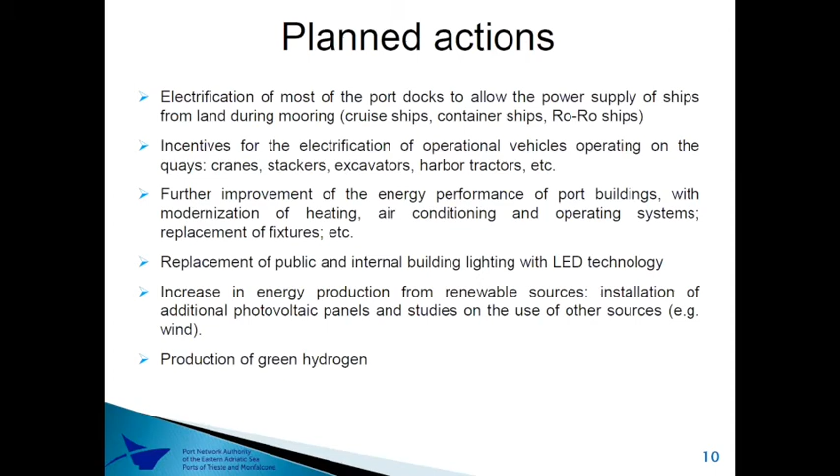What are some other activities we are doing? We have to increase awareness and incentives towards port users. We have to continue monitoring greenhouse gas emissions in the ports, but we also would like to widen the scope of this analysis.

So far we have analyzed what happens in the port - from when goods arrive by sea to when the truck or train leaves. But what we would like to do, and think is challenging but absolutely necessary, is to study the greenhouse gas emissions from a supply chain perspective.

Only by involving the right stakeholders - the shipping companies, the terminal operators, but also the terminals in Central Europe where our goods arrive, and the related railway undertakings - can we actually work together and find common solutions. We'd also like to achieve the 50001 certification.

So some words about cold ironing. As I said, this is what we have been doing. If we imagine that in 2026 all the terminals will be cold ironing ready, then ships will be able to actually plug into our grid. Then we will drastically reduce that 65% of CO2 equivalent emissions.

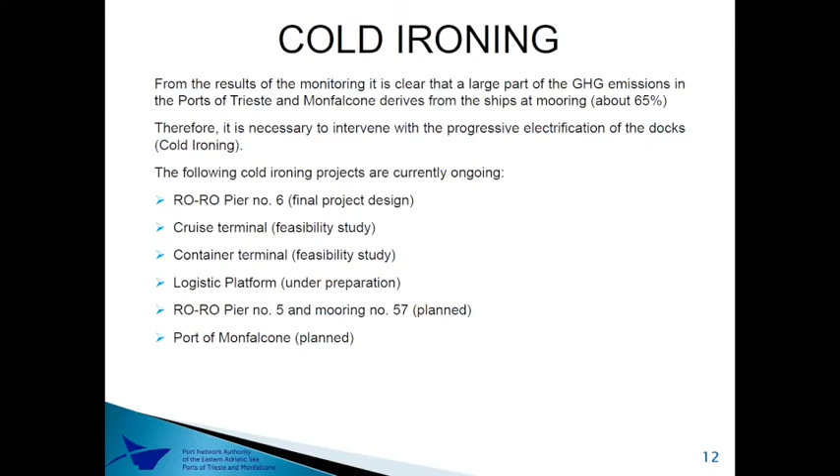But there are some obstacles to be tackled. First of all, the small spaces in the port. As I said, the port of Trieste is not very big, is surrounded by the city, and the necessary infrastructure is quite bulky.

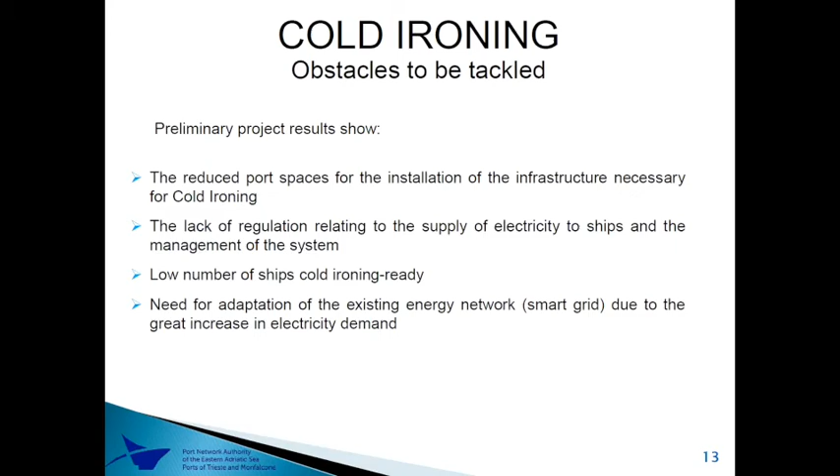Then there is a lack of regulation. There's a low number of ships cold ironing ready, as we have already seen. We need to adapt the electrical grid at the national level, but we also want to add a fifth point, which is the cost. Because at the end of the day, if we do not make electricity the same cost as normal fuel or less, then shipping companies will certainly not use it. So this is a point of interest for national policymakers, but I would say EU policymakers, because otherwise there might be competition problems around Europe.

Well, as I said, I've already covered these topics. I have no more information for you, but of course I remain available for any questions later. Thank you.